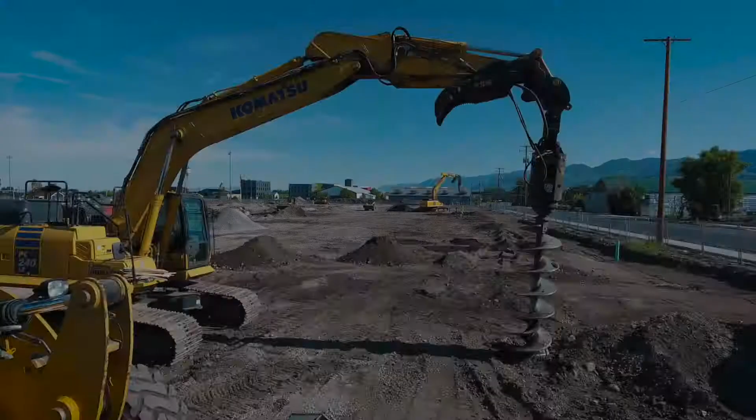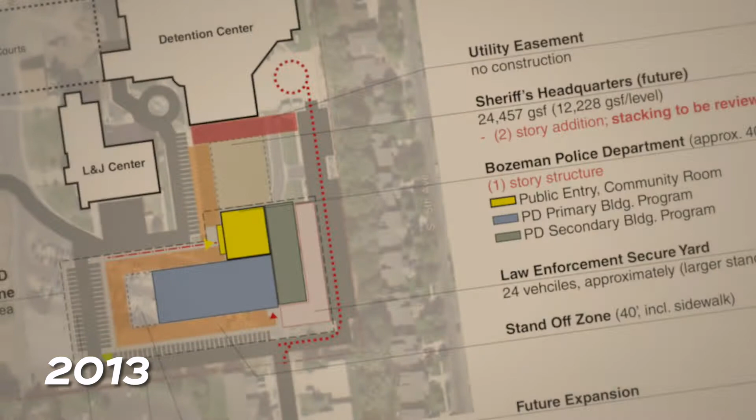Before we look at where we are, let's take a quick trip in the Wayback Machine and see just how far we've come. The origins of the Bozeman Public Safety Center go back to 2013, when we knew we had to find space for our police, courts, and prosecution, as we were outgrowing the Law and Justice Center on 19th Street.

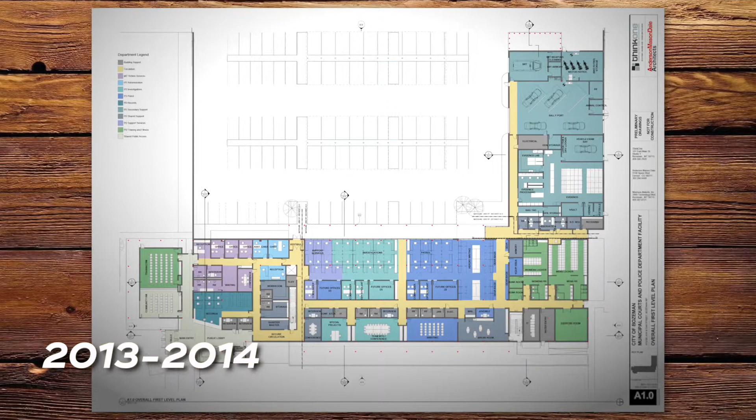In order to find a place to build, we did a land exchange with the Montana Department of Transportation for their approximately 8 acres on Rouse Avenue. We traded them 13 acres out at the water reclamation facility and got this buildable lot for the Rouse Justice Center. We worked for a year on design of the Rouse Justice Center and put it before the voters in 2014. That $24 million project was not approved.

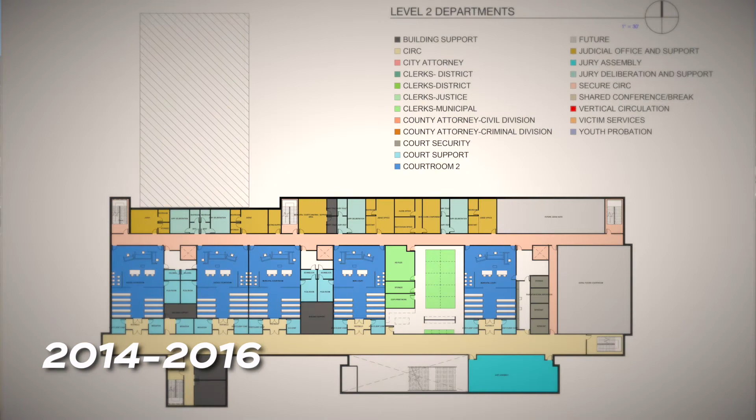We spent the next 2 years working with Gallatin County on a joint law enforcement and public safety building on their property on South 19th. That project included District Court, Justice Court, Municipal Court, Gallatin County Sheriff's Office, the Bozeman Police Department, County Attorney, and City Attorney. That was a $74 million project put before the voters in 2016. That project did not pass either.

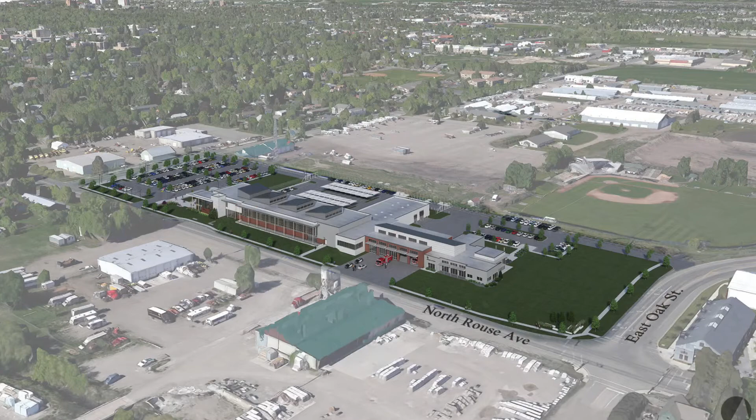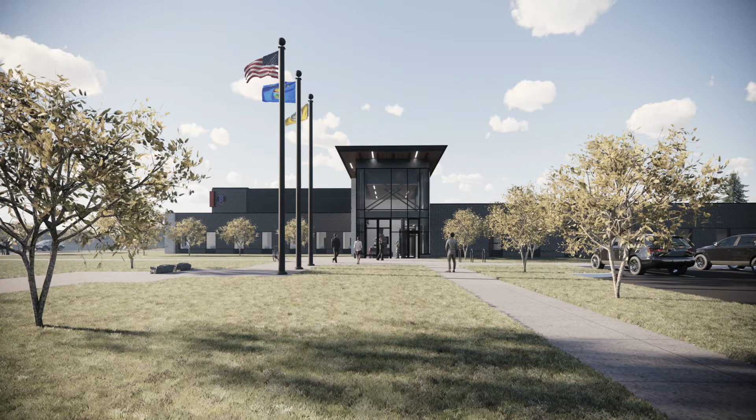Looking at our options after the failure of the Joint Law and Justice Center, we went back to the Rouse site, added a fire station to the bones of the Rouse Justice Center, and created the Bozeman Public Safety Center. This 100,000 square foot building includes a brand new Fire Station 1, 3 municipal courts, a brand new police station, services for prosecution and victim services. It also has secured parking for the police department's fleet, a community room, and other joint areas in the building.

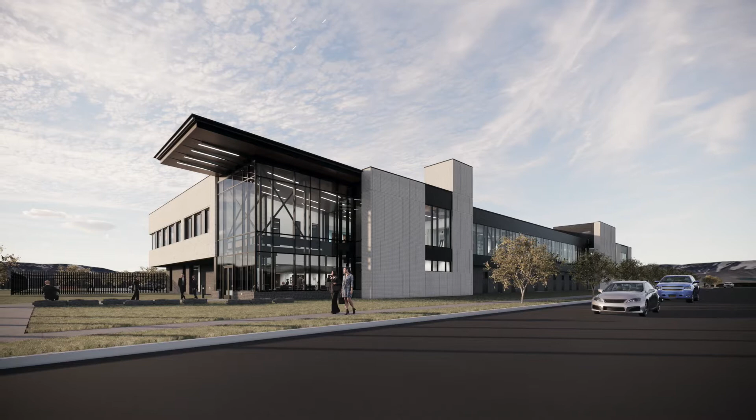The Bozeman Public Safety Center was a $40 million ask of the taxpayers, and that was approved in November of 2018. Upon its passage, we immediately got to work to finalize design, taking what we knew back in 2014, updating it, and adding a fire station to the project.

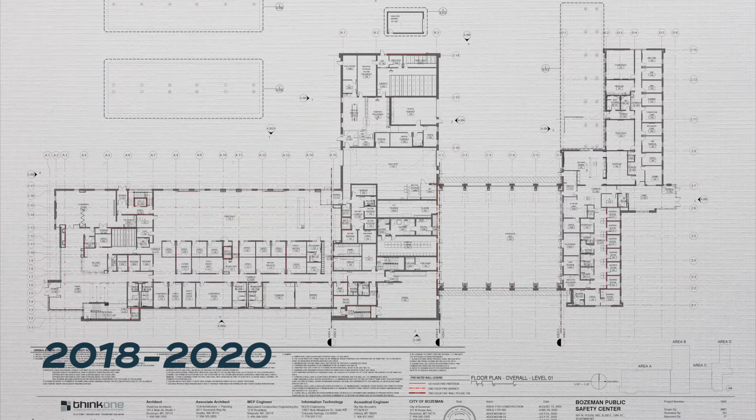As you've probably heard, construction in Bozeman is expensive, and it gets more expensive every year. We had to apply a 6% construction inflation factor. So back when we asked the voters for the money, we had to roll forward the construction and design of this project. We went to bid in summer of 2020, and were fortunate enough to receive bids within our budget.

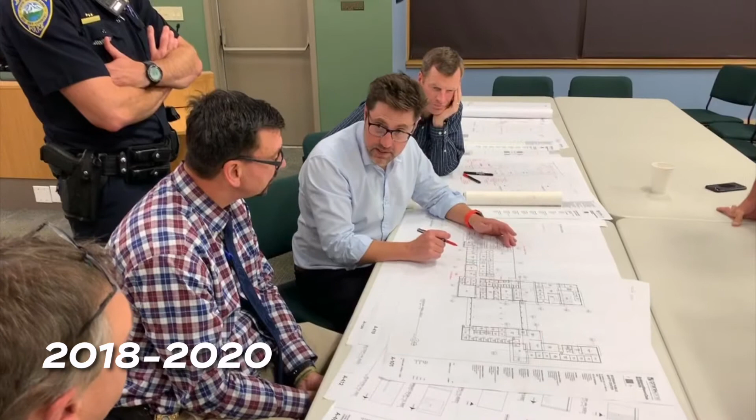Between the approval in November of 2018 and summer of 2020, a highly dedicated team met regularly to finish the design of the building, to make sure it operated the way we and the community needed it to, and that we could take advantage of shared space between police, fire, courts, victim services, and the city attorney's office.

In order to use the 8 acres we got in the land exchange, we had to demolish approximately 12 structures. We had to remove a bunch of decades-old use and development on the site, and work with the Montana Department of Transportation on some cleanup of the soils.

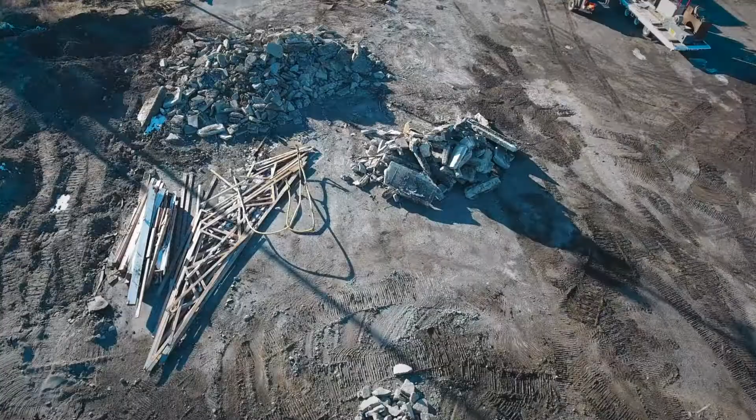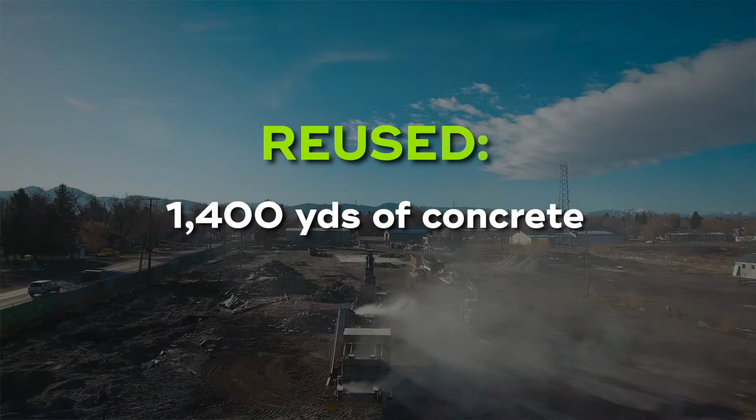Most of the buildings and building materials were reused, recycled, or repurposed during demolition and preparation of the site for construction. We also reused the concrete, about 1,400 yards of concrete and 2,400 yards of asphalt. Rather than haul it off to the landfill, we crushed it and reused it on site for the building pads and the foundation.

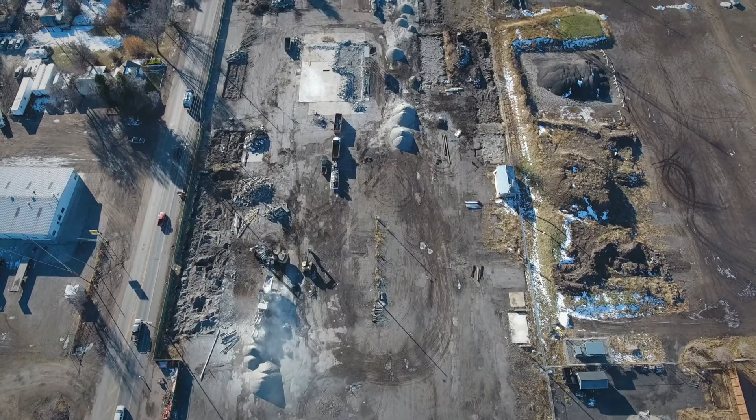Several local nonprofits were very happy to receive some of the construction materials, and actually whole buildings were reused in other parts of the county.

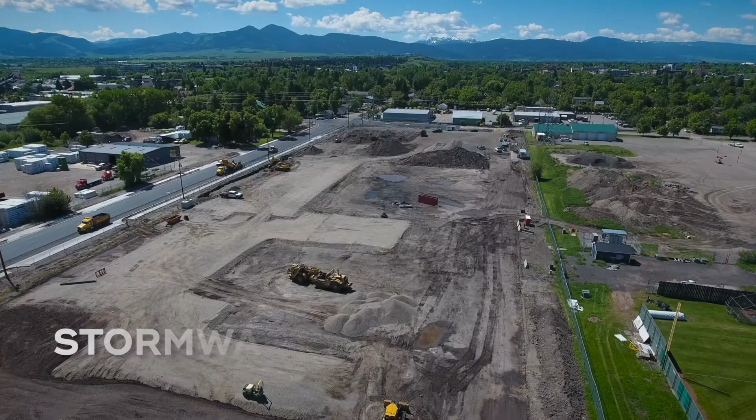Being good stewards of our natural resources is important to this city, important to the commission and the staff, and was central to all the planning and construction here on site. All of our stormwater generated on this 8 acres will be treated here on this 8 acres and remain on site. We will not be discharging any stormwater to receiving streams or other stormwater systems.

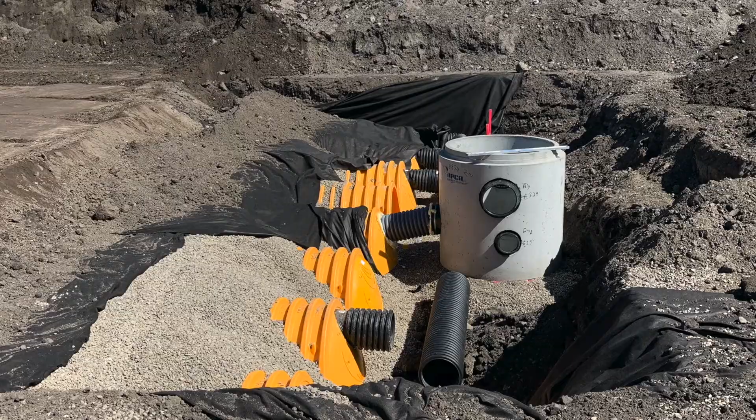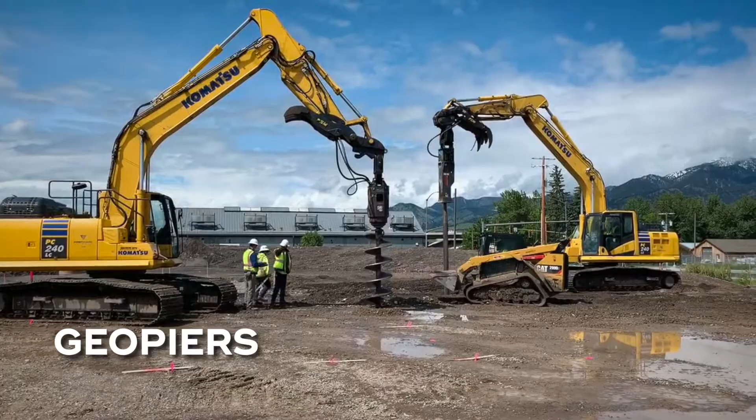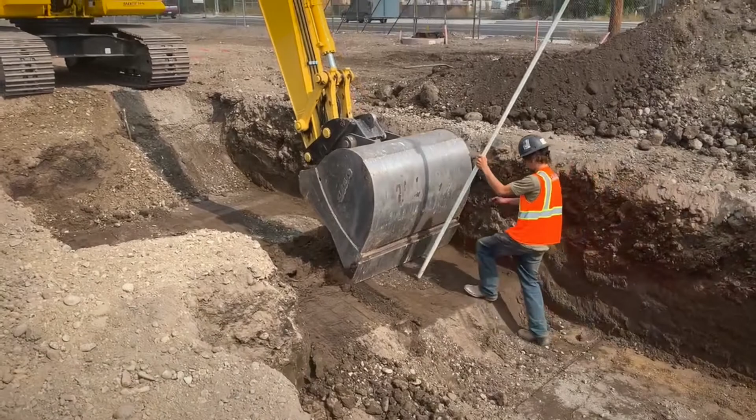Site preparation included the installation of approximately 680 geopiers. A geopier is a 30-inch hole drilled in the soil, going down to the bedrock. We took crushed concrete we had, instead of hauling it off to a landfill, and reused it on site. That got put down into the geopiers and rammed, creating a structural base from which to lay our footings and foundation walls.

Installation of the footings and foundations required 85 tons of rebar and approximately 1,300 yards of concrete to build the foundation on which the Public Safety Center is going to stand.

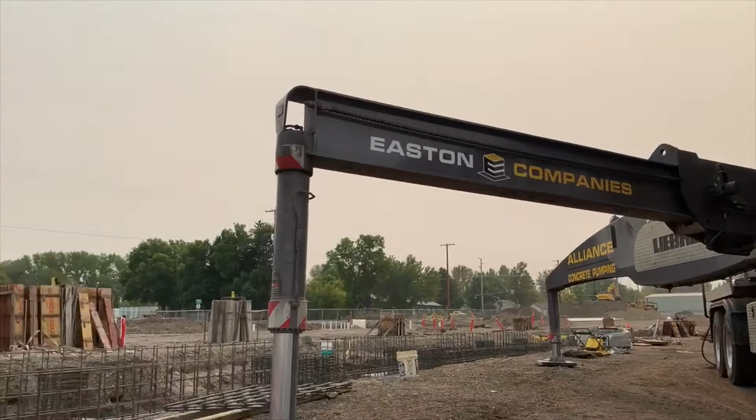It's built to essential building standards, which means it's the highest level of construction, so we can be assured that this building will stand through all natural disasters, including earthquakes, and will be a place that emergency services can be based out of when they're needed the most.

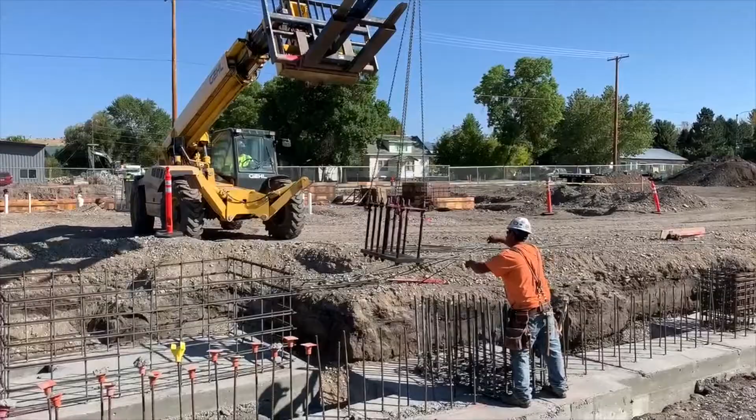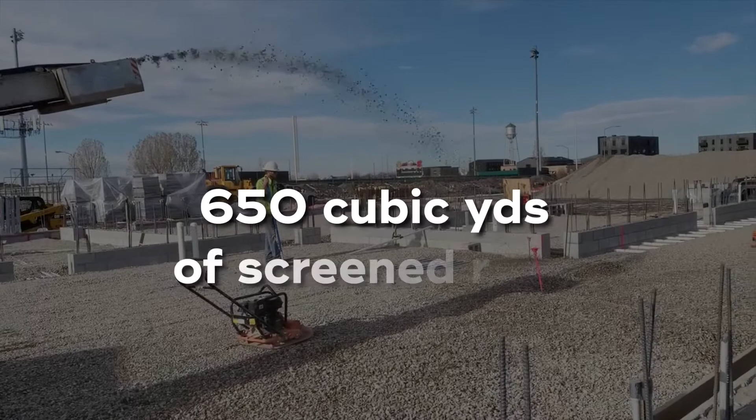The building so far has 65,000 feet of plumbing and electrical pipes and conduit. We've used 3,400 cubic yards of structural fill and 650 cubic yards of screened rock. And we're just getting started.

Bozeman Public Safety Center, by the numbers, is a 3-story, 100,000 square foot building. A lot's been happening on the site, most of it underground. All the footings and foundation forms for the buildings and canopies have been installed.

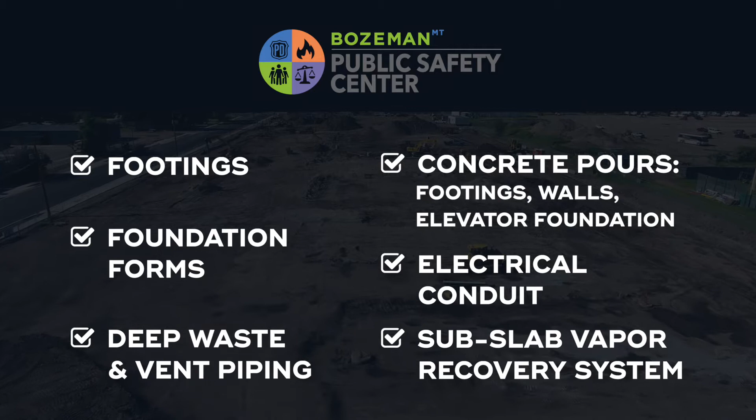We installed the deep waste and vent piping. We've done all the concrete pours, including the footings, the walls, and the elevator foundations. We've installed all the electrical conduit that goes under the concrete slabs, and a sub-slab vapor recovery system, which will ensure that anything in the soil will not make its way into the building. So what can we expect to see in the coming months?

We're going to continue working with our partners on the project, on the technology that goes in here, the building security and access control. Plus we have state-of-the-art technology in our courtrooms and our police interview rooms.

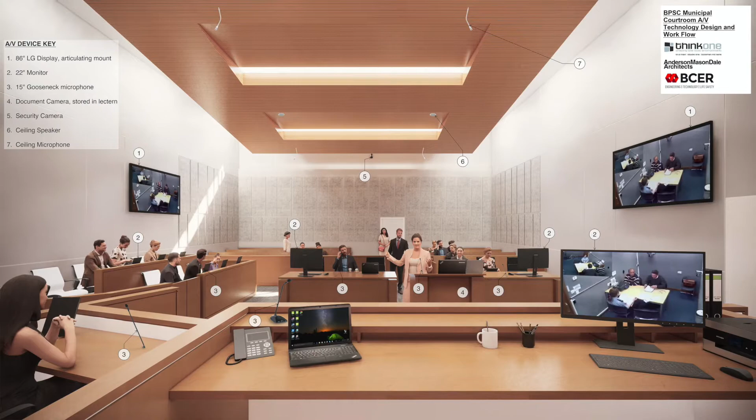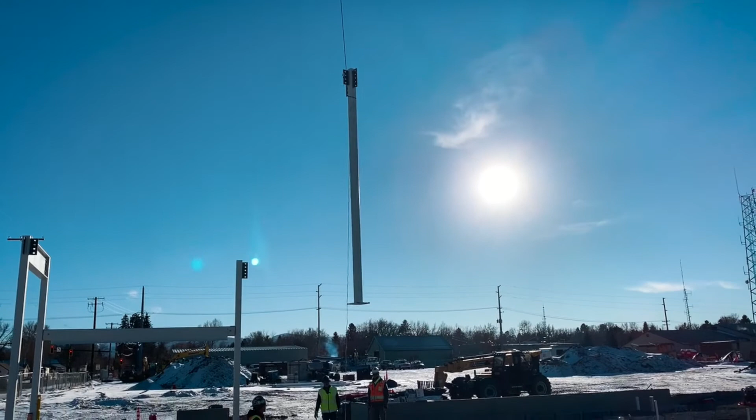We're continuing to work with the police department, the fire department, courts, and prosecution on all of the office furniture that's going to go into this building, in the private offices, the public areas, and the open office environments we have. We'll also see structural steel show up on site, and we'll see the building go vertical.

It'll be good to see the project come up out of the ground, start to take shape and form, and start to fill in. So we're looking forward to that part of the construction moving forward, and of course we'll provide another update as things change.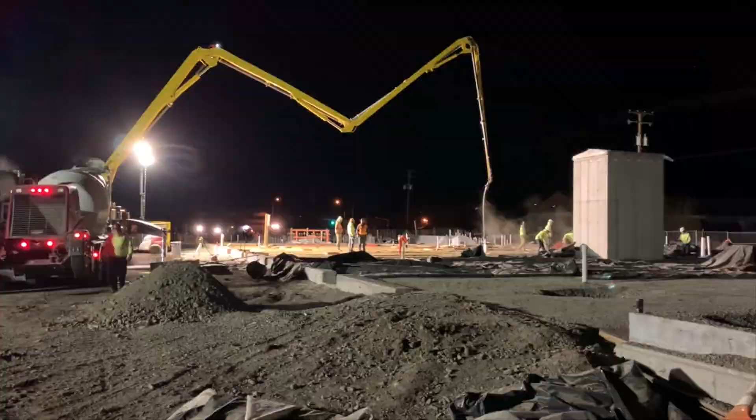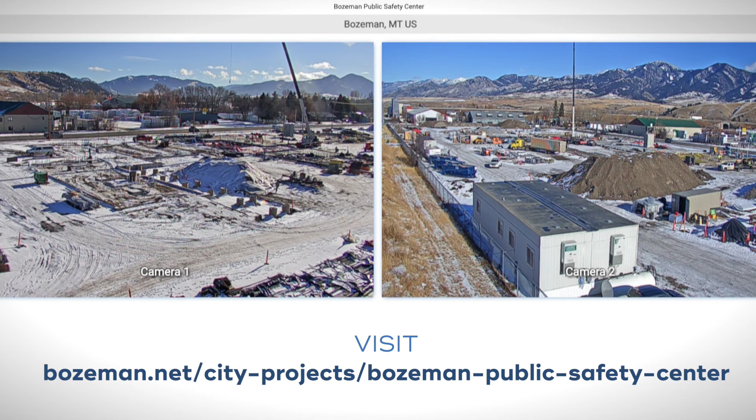Anybody interested in seeing the progress can log into the webcams. We have 2 webcams here on site, 24 hours a day, showing construction progress. We're also creating a time lapse of the building, so from day 1 all the way through its opening, we'll be able to look at the construction of this really important public safety asset for the city of Bozeman, Montana.